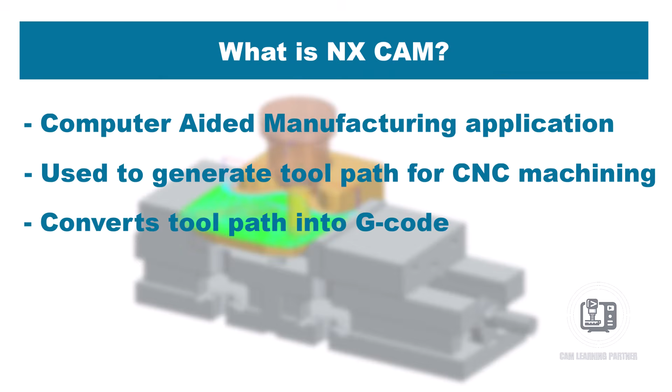In this first video, we are going to take a simple example, but we are going to touch upon all the elements, starting from importing a geometry to setting up your coordinate system, defining the workpiece, setting up vice, tools, creating toolpath, and post-processing. All of this will help you to get started with NX CAM and to create your first toolpath.

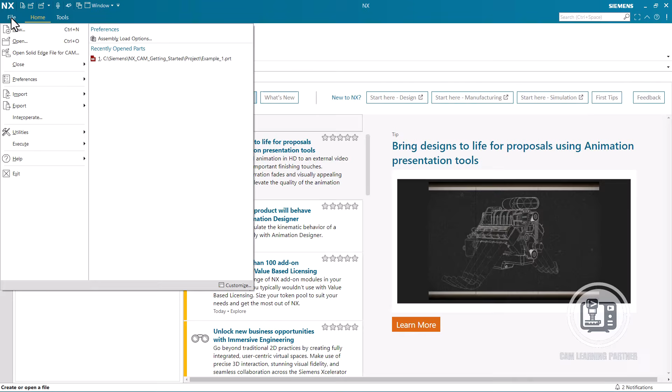So let's start. I have the NX CAM application open right now. Inside the application window, you will see some ribbons which will be quite common across various environments, for example in manufacturing. First you have a file menu where you can create a new file, open an existing file, open even Solid Edge files, and access preferences and much more. We will go through all of these options later in more detail.

Then you have Home tab and Tools tab. These tabs hold various functions on their own, and these functionalities may vary depending on the environment you are in. Right now we are in the gateway, which is the main entry point of NX. Here you will see new, open, similar functionalities that we saw in the file menu and many others. We will cover functionalities like assemble, load options, customer defaults, etc. as we move forward in future videos.

Then on the left hand side, you will see a settings button that will allow you to control the behavior of your resource bar on the left hand side. And then you have other options such as notification center, browser, history or recent files, roles, which is very important, and we will come to that in a few minutes.

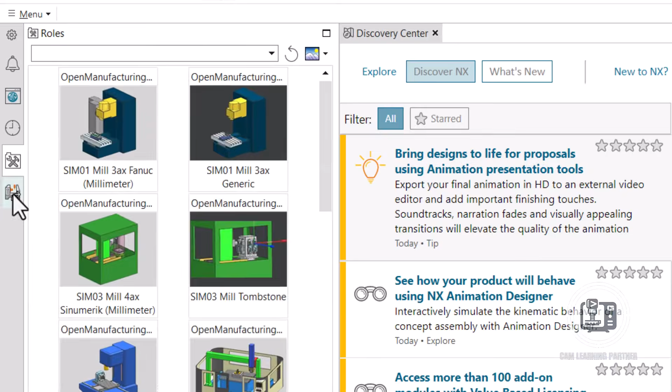And then you have manufacturing samples, which are related to the CAM environment. Here you can open any existing manufacturing sample that is supplied inside NX CAM by default out of the box. You can open these samples and observe how they are set up. But today we are not going to go through these samples; we are going to create our own project.

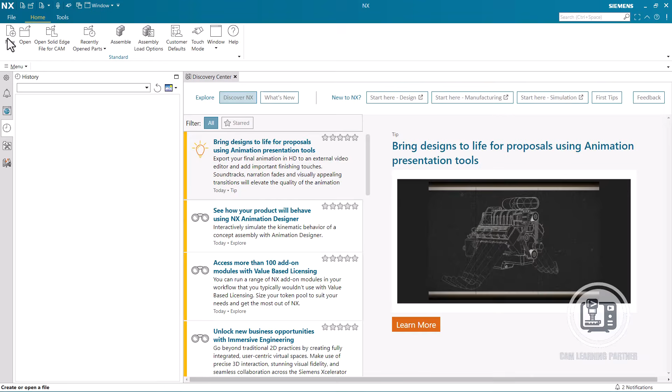So let's start by creating a new file inside NX. Once we select the new button, NX presents us with a new dialog where we can choose the type of file that we are trying to create. Here we can choose to do a new model, a drawing, an additive manufacturing model, or anything else. Currently we are interested in a manufacturing file. So we will choose manufacturing, and then inside templates we will choose blank.

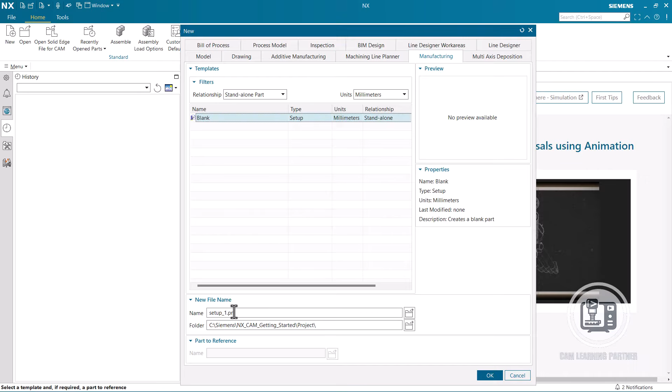We can also refer to an existing file in case we already have a 3D model and we want to create a new project based on an existing model. We can also change the units if we want, but right now I will go with the default, which is millimeters. Then we can define the file name and the place where this file is going to get saved. This is fine for now, so we will click OK, and then we will jump into the manufacturing environment.

Once we click OK, NX presents us with the manufacturing environment, and this is where all of the programming will happen. Don't get overwhelmed by all of these buttons and options that you see right now. We are going to go through many of them in this video, and by the end you will be familiar with a lot of them, you will feel at home, and it will be the best place you will want to be inside your system.

We see this little dialog first of all, because currently all the buttons are grayed out. So we have to get rid of this dialog. So what does it say? It basically asks us for the session configuration and the setup that we want to create.

So it's not like we need to specify anything right now. We just keep it to default, which is CAM General and Mill Planar. We can configure everything at a later point once we start building our setup. And we want to be flexible, so we will go with the defaults.

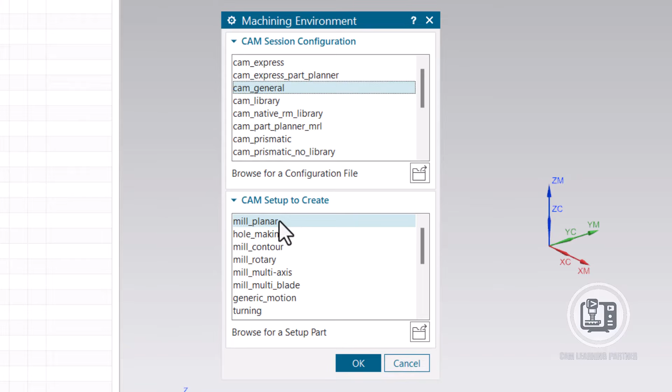But if you want to choose any specific setup, for example, turning, or you want to build on a session that has some configuration on library, on prismatic part, etc., then you can choose your configuration or your setup accordingly. Let's click OK for now. And now we are in the manufacturing environment.

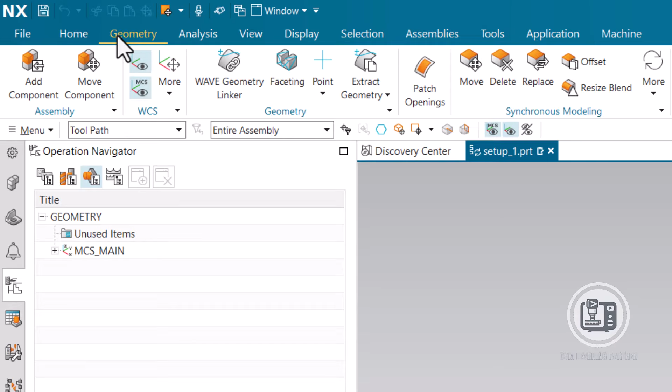So inside the manufacturing environment, notice that you have a lot of other ribbons, such as besides Home, you have Geometry for functionalities on everything geometry related. Then you have the Analysis tab for analyzing your model, View tab to control everything around view, creating sections, planes, etc.

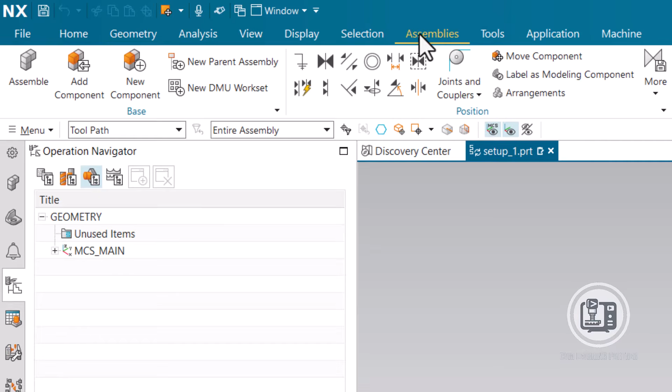Display tab to control the model display, Selection tab to handle how the selection happens inside NX, Assemblies to import new models, define relationships, moving the components, etc. Tools tab to help you with any miscellaneous functions such as moving objects, assigning materials, expressions, recording, etc.

And then the Application ribbon that holds all the rest of the environments, and from this ribbon you can access any other environment such as modeling, drafting, and many more. And then we have Machine. Again, you can choose to have various other tabs also.

You can customize this basically by clicking the right mouse button and enabling or disabling any other environment or ribbon. But right now, let's go back to the default, which is the Home tab, which holds all of the important functionalities. So inside Home, we have many important buttons that are going to help us to create our toolpath and to do everything else.

So it's like a workflow. If you start from the left, you first want to create your tools. Then you have to set up your geometry, and finally you create your operation. Then you have options to choose any strategy that NX tells you would be the best fit. So it predicts your behavior inside NX CAM, how you use the application, and it tells you what would be the most probable strategy that you may want to use.

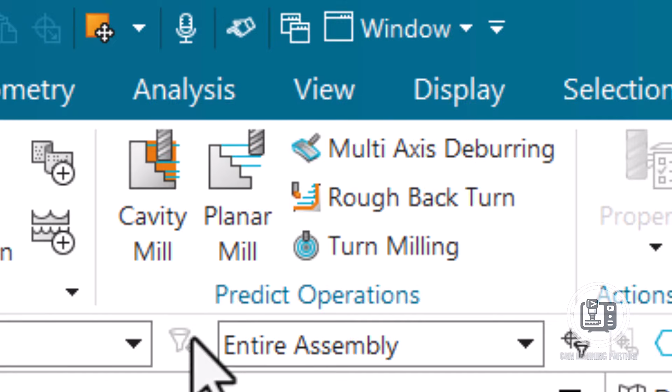And then you have additional actions such as generating your toolpath, checking your toolpath for any collisions or gouges, validity report, verification of the toolpath, simulation, post-processing, and many other functions that we will take a look at in the later part of the videos.

On the left hand side, you have the Assembly Navigator, where if you have an assembly, you will see the whole structure. Then you have the Part Navigator, where you will see everything related to your part, such as the model tree, your planes, sketches, features, etc. And then the most important thing is the Operation Navigator, where we will be spending most of our time inside NX CAM.

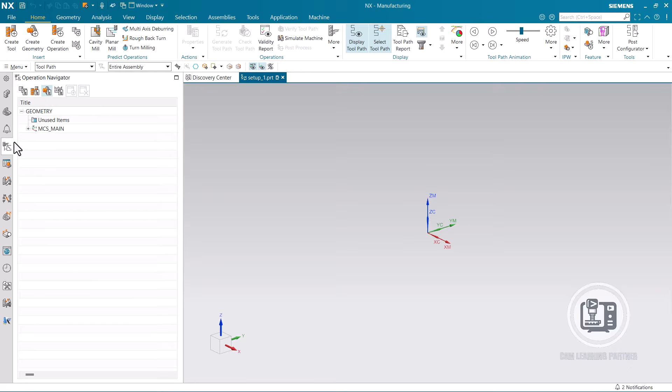So these two things are most important. First is the Home tab and second is the Operation Navigator. This is where we have to be in case we are working in the CAM environment. Now remember, in the beginning I told you that roles are very important. You have to go to Roles, choose Industry Specific and set it to CAM Advanced.

So you can double click on it and choose OK, and it will set your CAM environment to a more advanced user interface or layout, where you will have most of the common functionalities available. You can still configure the roles depending on your preference and how you use NX CAM day in and day out. But let's go with the default role. Now we are back to the Operation Navigator and the Home tab.

So we have to start with the model now, because we need something to generate our toolpath on. Currently it's empty. So let us import an example part file that I have available with me. So I will go to File, Import, and then I will choose STEP file. So STEP 214, I will browse to the file in the Explorer. So now my 3D model is finally imported from the STEP file.

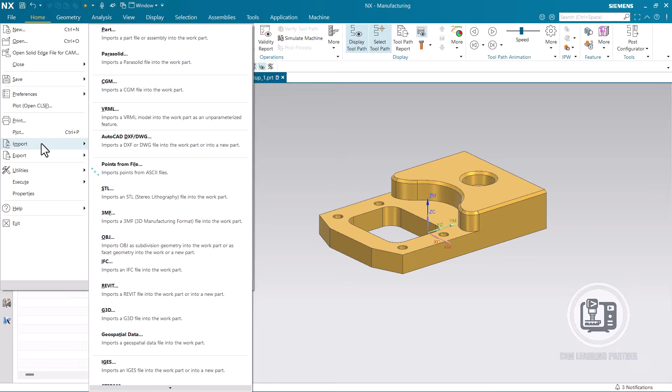Similarly, I would want to import a vise. Obviously, this part will not be machined on its own. There will be some work holding device that will be clamping this part on the machine. So we will be using a vise right now. I have this vise already available. So I will import this vise as well.

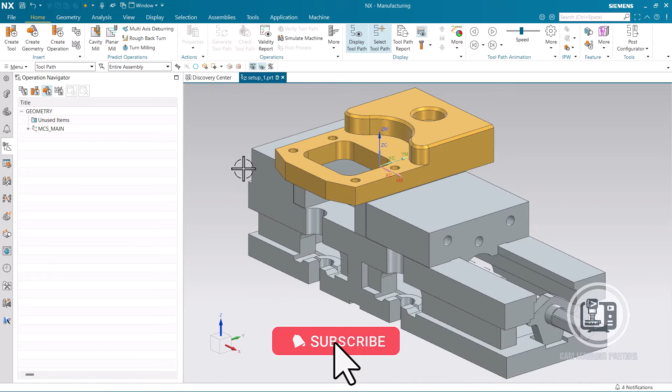So finally, the vise is also imported. Let's double click in the empty space to fit everything on the screen. Now notice that the part is out of the vise actually. It's not completely fitting the vise.

This will be the case most of the time when you import multiple objects in NX CAM, because obviously all of these parts will not be fitting well with each other immediately the first minute you import them. So you have to align them properly so that they are located in the right place. So how do we do that?

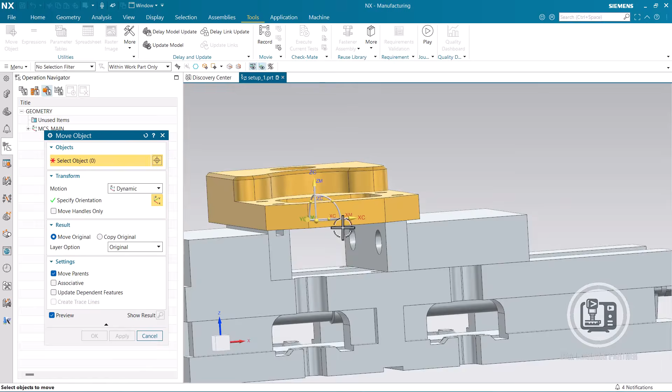We can either move the vise or the part. In this case, I think moving the part will be an easier choice. So let's do that. I'll go to the Tools tab and choose Move Object command. The Move Object command helps us to move the part file or any other geometry inside the CAM environment specifically in this case.

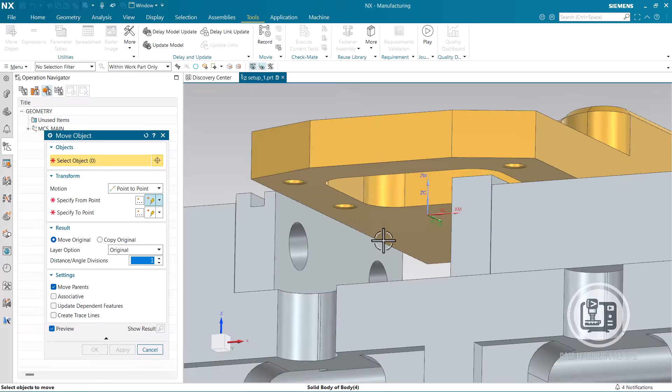So I will choose the part and then I will choose the method by which I want to move this model. I will choose point to point method. I will choose the midpoint here on my workpiece, and then I will choose the midpoint on the fixed jaw. Once I do that, I will hit apply. By clicking on the apply button, the dialog box stays open and my function executes. So in this case, the part is now moved to that midpoint.

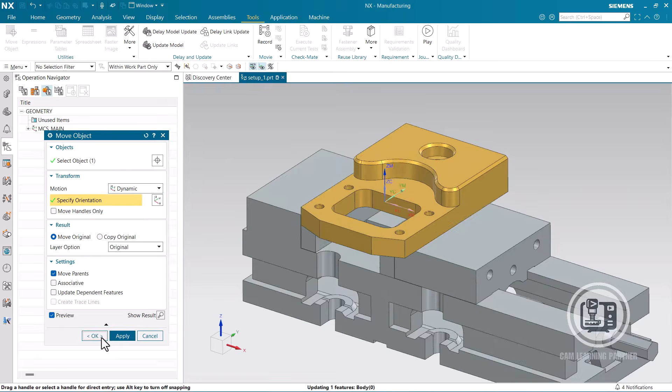Secondly, I want to move this part slightly on the inside of these two jaws. So I will again select this object, but this time I will do a dynamic move. I'll choose the Z axis and move this part, let's say -8 millimeters, so that it goes on the inside. I'll click OK. And now you can see that the part is on the inside of the fixed jaw.

But on the other hand, we have some problem here. The part is actually inside the jaw. We don't want this. So we have to move this jaw also. So how do we move this jaw? First, we have to know what is going to be the exact distance. So either we can use the same method, that is moving this point to the midpoint of the part, or rather we can analyze the dimensions of the part, which is going to be a very handy function for you whenever you are working on any part.

So if you are working on a 3D geometry and you are going to machine that part, you have to know the dimensions or the size. So you can use this measure command to measure the dimensions such as height, length, width, angles, distances, all sorts of things. So I've chosen the object type measurement and I selected two faces on the model. Notice how NX automatically presents the distance, which is the minimum distance right now based on my selection.

I can also choose points or bodies in case I want body or point type measurement. I can also have point selection, vector selection, and much more.

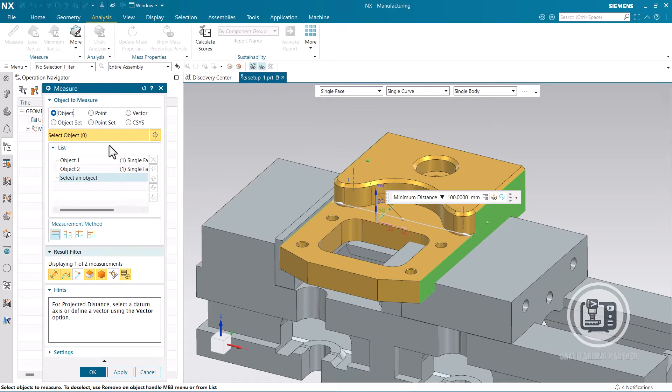So now I know that the distance is 100 mm. I'll click OK. So now let's align the second jaw with this part. To align the second jaw, we will use the same command, but we will use a shortcut key now, that is Ctrl+T. Then I will choose the object, and now I will select distance between points method to define the distance between the jaws. So I'll select the origin point and then the measurement point and the vector. I can choose these vector directions to define the direction along which the movement has to happen.

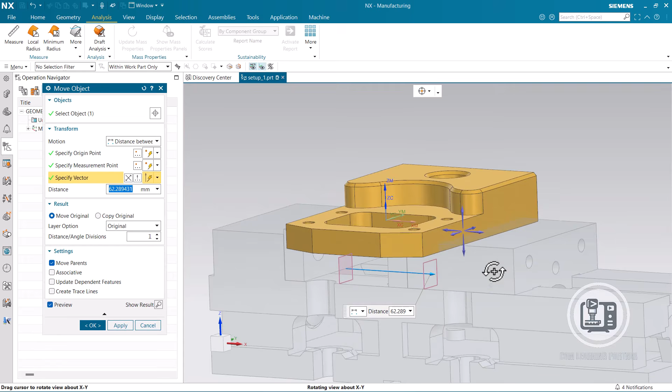Now once the direction is defined, I can define the distance, in this case 100 millimeters. So this will actually move the part. But notice that we were not interested in moving the part, so I will shift and click on the part to deselect it, and then instead select the second jaw. Notice how I went back to my selection and changed it by using the shift key. So you have to press and hold the shift key, and then if you make any selection, it will deselect that object.

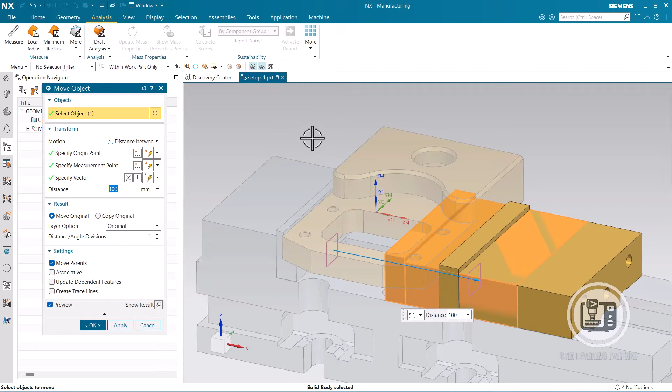Then I will click on the OK button, and my second jaw is also moved. And there we have it. Our setup is almost ready. So the next thing that we need in our setup is the blank geometry or the stock. The stock is required to define the initial material. Obviously when we are going to manufacture this part, there will be a raw material. So we are now going to define the raw material for producing this part. We can go to the geometry tab, and then inside the point drop down, you will see the bounding body command.

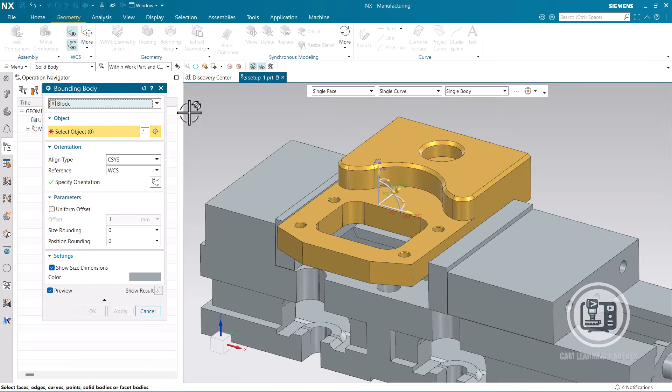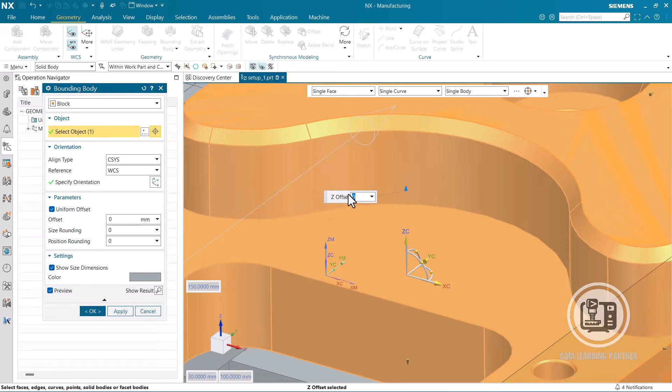So this is very useful, and it can allow you to define a block, for example, or a cylinder. So I can choose the object, and NX will automatically generate a bounding body, in this case a bounding block. I will define a 0 mm offset because I don't want any additional offset, but rather I'll just add 1 or 2 millimeters of distance here. So basically a top offset, because I want to do a face milling as well. I'll explain what that is in a few minutes. I'll click OK. And now our stock model is also defined.

Now with everything defined for our setup, we just need to get rid of these coordinate systems, or at least do something about them. You can see these coordinate systems XM, YM, ZM and XC, YC, ZC. And then you also see this coordinate system in the bottom left corner of the graphics area. This is the universal or absolute coordinate system. It basically indicates the directions of your main coordinate system. It is not the place where your main coordinate system is located because it is static and remains fixed on the screen.

The second thing is your work coordinate system. If you press W, your work coordinate system will get hidden. If you press W again, it will be shown again. So depending on the use case, you can enable this, but right now we can simply hide the work coordinate system because we don't need it right now.

The last thing, but the most important one for CAM programming in NX CAM, is the machine coordinate system. It can be defined by going to your operation navigator, which has 4 views: program order view, machine tool view, geometry view and machining method view. The machine coordinate system is defined in the geometry view. We are already in the geometry view, and choosing the MCS. If we expand the MCS, you will see workpiece and another MCS. These objects come by default when we started the manufacturing environment.

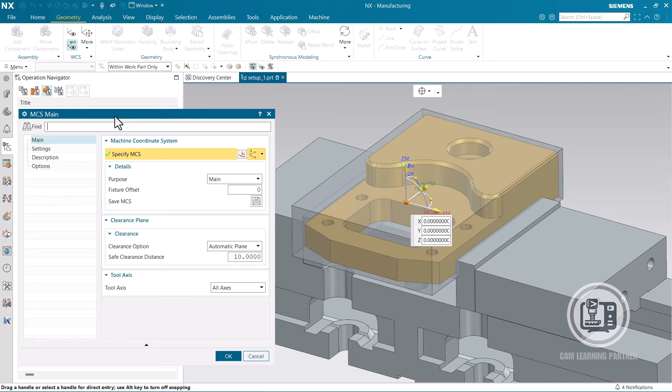MCS gives a reference for your toolpath, and whenever you post-process your toolpath, it will generate the output coordinates, XYZ values in case of 3 axis, with respect to this machine coordinate system. So your machine will also have to be set up accordingly, and that is how your machine will know where it has to go. For each point there will be an X, Y and Z value defined with respect to a certain point, and that is what this MCS is all about.

For us, I want to simply keep it on top of the blank or the stock. So I will choose the top face, and I have chosen CSYS of object, that is coordinate system of object. Automatically this coordinate system is now aligned with the center. I will also link the reference coordinate system with my main coordinate system. It is not of much use in the beginning, so we can just set it with respect to MCS right now. I'll cover the reference coordinate system and its use cases in later videos.

Next is the purpose of this main MCS. We will change the purpose of this MCS to local, set it to fixture offset and give the fixture offset value as 1. The value of 1 means that the fixture offset will be output as G54. G54 is important because on the machine we will be setting this offset value, and the machine has to know which offset to use. We have to choose local because we are using a local coordinate system, not a main machine coordinate system as such.

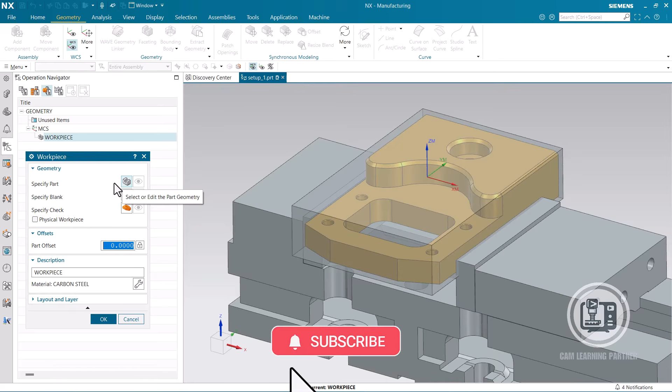Let's define the workpiece now. So we are getting close there to our toolpath. We need to set up the workpiece though. So for workpiece, we need to set up 3 main objects primarily. The third one can be optional depending on whether you have it available or not. But the first 2 are mandatory for most of the toolpaths.

So first one is the part. Obviously, you need to define the finish part. So I can keep my cursor on the object, on the workpiece or blank, and then it will give me choices. I will choose the final part, which is my workpiece, and then I will choose blank. So for blank, I will define the blank geometry that we created earlier, and I'll click OK.

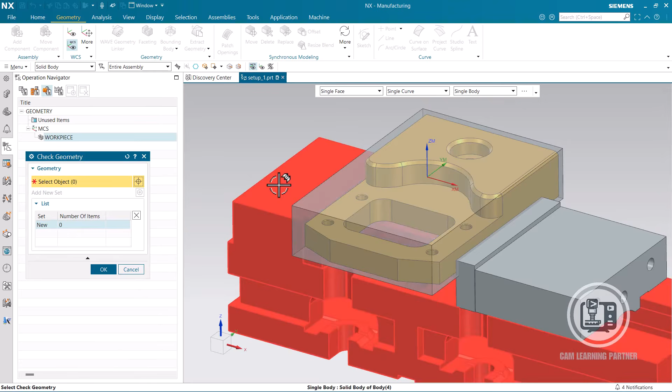And last is check. Because we already have the fixture defined, we will define this as our check geometry. So this check will be used to avoid completely when generating a toolpath. So if we have this kind of setup, NX CAM will try to avoid the jaws and ultimately prevent any kind of collisions that may happen when you actually run this toolpath on your machine.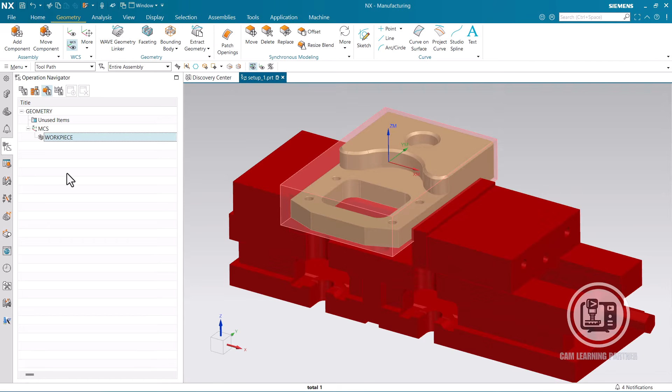You can define additional offsets right now, but we don't need to in this case. So we'll click OK. And then if you select workpiece, you will notice that everything is completely defined. These colors indicate that something is defined as check, something is defined as blank, and your workpiece.

Now with this setup, let's go ahead and define our tools, because remember we started with the process. We had to define our tool, the geometry, and the operation. We defined geometry already because it was the first thing that was coming on our operation navigator. Obviously there is no specific order as such. You can start with geometry, then define tools, or even you can create operation and then inside your operation define geometry and tools. So it's up to your preference, but it is also recommended that you start from the left. Now let's go ahead with the tools.

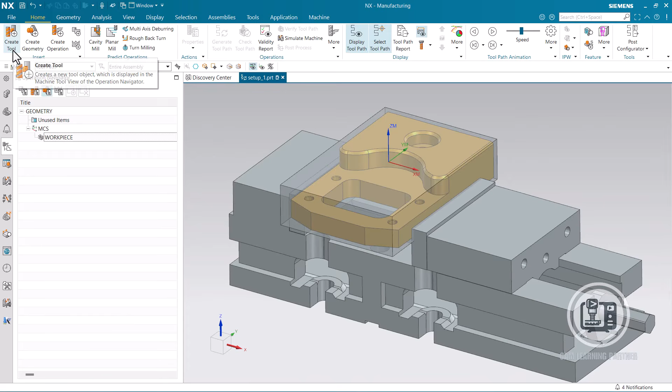So to create tool, you can select the create tool button. Now you have a lot of options. You can choose which type of tool you want to create, whether it is a flat end mill, chamfer mill, ball mill, spherical mill, etc. I can also retrieve tools from the library. So if I choose retrieve tool from library and I choose a milling tool, then I can give, for example, diameter of 20, and I can call a 20 millimeter tool. I'll click OK.

I'll call another tool, this time let's say a 50 millimeter for facing. And we can see the preview of these tools also if you want. So we can see the preview as well. I'm happy with this tool. I'll click OK. In case I want to create any other tool, I can select the tool type, click OK.

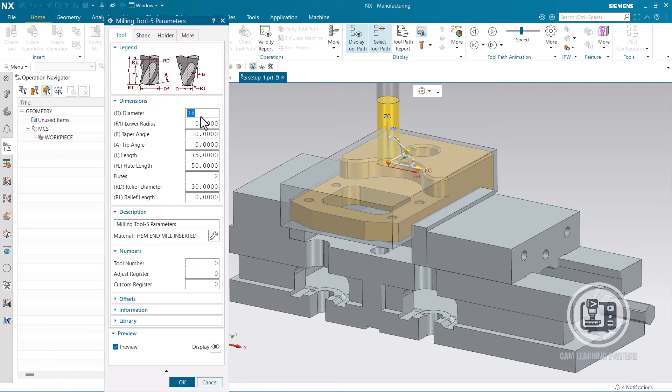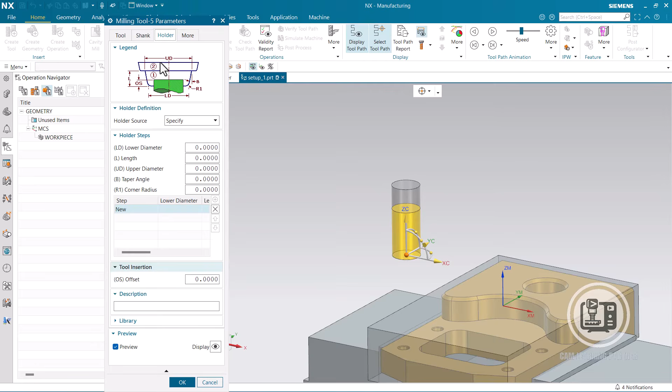And then I can define the diameter and various other parameters that you see on the screen. So depending on these parameters, the visual will also update. You can see the tool getting updated, and then you can also define various other parameters. For example, I'll define the flute length, total length, even define the holder. For example, I can go to the holder library, retrieve a new holder, or even I can choose to create a holder on my own. But right now I'm happy with the predefined holder from the library.

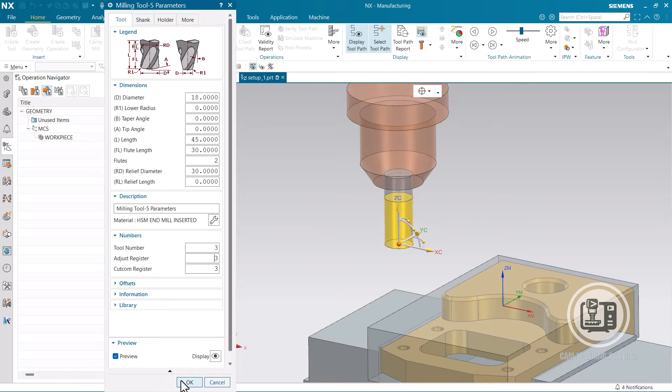I can define the insertion offset also if I want to. I can define it as 5 mm, let's say, and I can give the tool number also. So I already created 2 tools, so I will give this tool number 3, and I will also give adjust register and cut comp register. These are basically length adjust offsets and cutter compensation offsets. More on these in the later videos. Let's click OK, and my tool is set up.

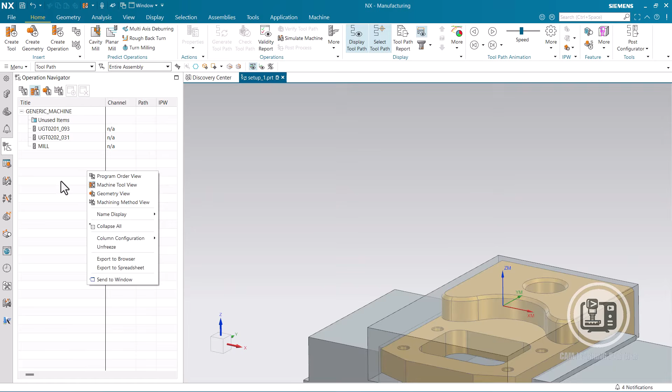So if I go to the second view, which is machine tool view, you will see all these tools defined over here. I can also configure these columns so that I see the relevant information immediately. You can go to column configuration and then configure your columns. We'll cover this later, but it is possible. Let's check if these tools have the right tool numbers. They don't, so I will define the tool numbers. Now all the tools are defined with the tool numbers. So now we are good to go to create our first toolpath.

Now let's hide the blank for simplicity purpose. So we will go to the part navigator and hide the bounding body. Notice that the other bodies are imported. These are coming from our step file, so we can ignore them.

In case we want to make any changes, we can do that by going to the geometry tab and using the synchronous modeling functions to alter or change any type of geometry. But let's start with the toolpath. So I'll go back to geometry view and go to the workpiece and then right click and go to insert operation. Alternatively, I can select this object and click on create operation.

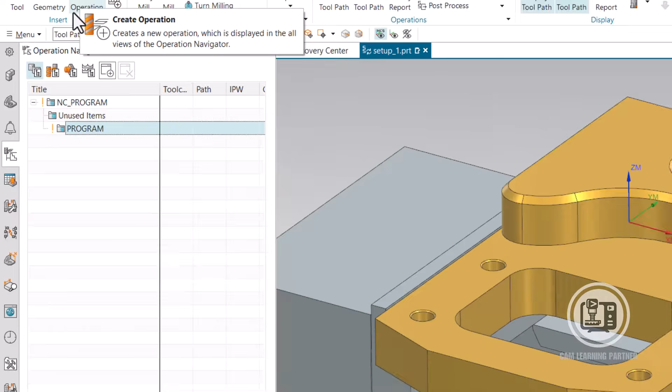You can also go to program order view, for example, and choose the exact location where you want to have your operation. This view, program order view, helps you to organize your programs and the sequence of those programs. So it is also very useful in case you have, let's say, multi-channel machines and you have a group of milling toolpaths and turning toolpaths. You want to organize them logically and in a sequential manner.

And there is a last tab which we did not talk about so far, that is machining method view. So the machining method view will help you set up some predefined settings, such as if I go to mill rough, you can see the stock or intol, outtol. So you can define an existing value that will be applicable for all the operations sitting inside this group. So if you set a stock of 0.5 mm, all the operations under mill rough will be using this 0.5 part stock value. And similarly, you can choose the intol and outtol.

These are basically tolerances. These allow your toolpath points to go inside the part or outside the part. So if it is balanced, then it mostly means that each toolpath point will basically vary between a certain tolerance range. So obviously the toolpaths are calculated on mesh in many cases, and there is a tolerance that comes into play. So this tolerance helps you to control to a larger extent the accuracy of your toolpath. Obviously you would not want to make it 1 micron, otherwise your toolpath will take so much time to generate.

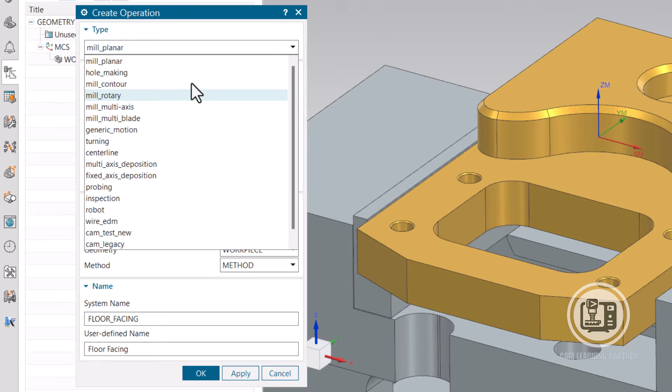And one important thing, it's not just these strategies. By the way, you have mill contour, mill rotary, so many other things. So if I go to mill contour, which is basically for 3-axis machining, you have various things like cavity milling, adaptive roughing, etc. Let's stick to the basics right now. We'll go to Mill Planar, and we were trying to create floor facing without wall because I want to do facing on top of this part and I do not have any walls right now. So I'll click OK.

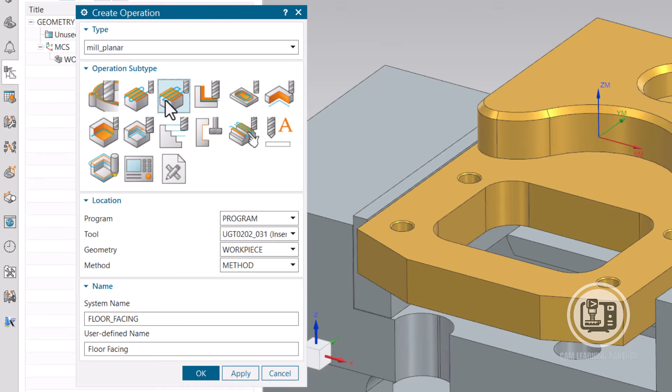Now for this operation, there are certain minimum inputs that are required, which is the floor or the cutting area. So I will choose this floor, but don't worry, because my toolpath is not going to be restricted to this floor. I have various options to control the extents of my toolpath. But let's go through some of the options, actually not all, because there are too many. And as I've been saying, due to limited time in this video, we will not be able to go through all these options, but in future, we will eventually cover all of these options in more detail.

So for now, because our toolpath needs some very essential settings to successfully create a good toolpath, I will choose zigzag. Maybe I will choose a step over value of 70, which is fine. And my tool is defined, so it's all good. If I go to feeds and speeds, I can set a speed, surface speed, feed per tooth, spindle speed, for example.

Let's keep some arbitrary values, and we can calculate the surface speed and feed per tooth accordingly. We can also control the rapid modes and then additional feeds such as approach feed, engage feed, etc. Let's go to cut region, which is also where our overhang value is defined. So I'll set it to 10%, for example.

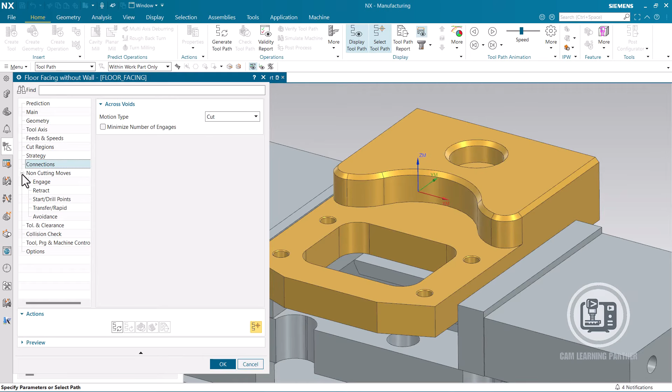Let's go to non-cutting moves, which is basically everything else besides cutting. We'll go to engage. Maybe we will choose a linear type engage and maybe relative to cut. So in whichever direction the tool enters, my entry will also be relative to that direction. And for the length of my engage move, I will choose a safe distance, let's say 70%, to give sufficient clearance to my tool.

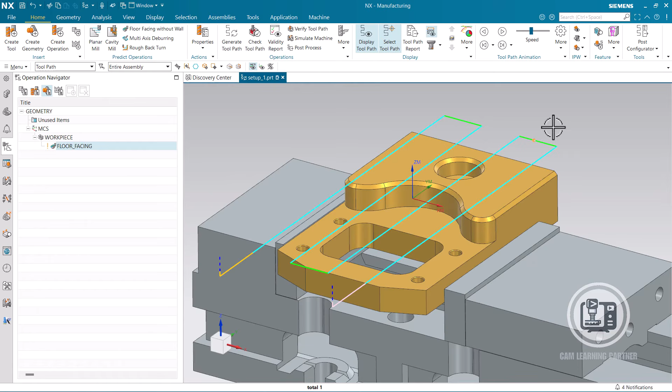So with that done, let's see how our toolpath looks. I would always recommend you to click OK and then generate your toolpath. So all of your settings for the operation would get saved, and then your toolpath would get generated. Notice that our first toolpath is ready, and we can already see this in the graphics area. So it looks beautiful, right? It's not just sitting there idle. We can do so many things from this toolpath.

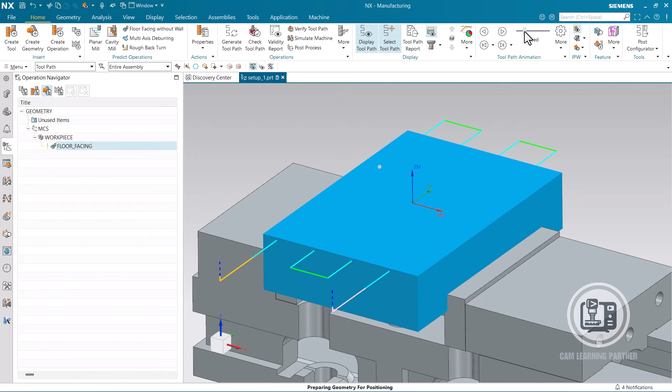For example, you want to see how the material is going to get removed, right? So we can show the IPW, which is in process workpiece. So our initial blank is now active. Let us slow down the simulation a little bit, and then I will play the animation. So the toolpath will now be simulated. Notice how the material gets removed. The tool is moving along the toolpath, and this is how the machining will also happen on the CNC machine. But now I think we are good with this toolpath. We don't need to make any more changes.

Let's go to the next step, which is machining this next step. So for this, I think an appropriate way would be adaptive roughing. So maybe I will go to mill contour. Although this is not a contour, I think the easiest way of generating an adaptive roughing toolpath on a stock model is using a 3D adaptive roughing. Let's choose a 20 dia end mill. It has some corner radius, so I think it will leave some material in the corner, but it should be fine for the example. Let's set the step over to 8% of the tool, which is good enough for us.

Cut levels are important now because we have multiple levels here. There's a top level, there's a mid level that we see here, then we have a bore or a counter bore, and then we have a bottom level as well. So I want to specify the top level and the bottom level to be this. I only want to machine this region and not anything else. I think this should be fine.

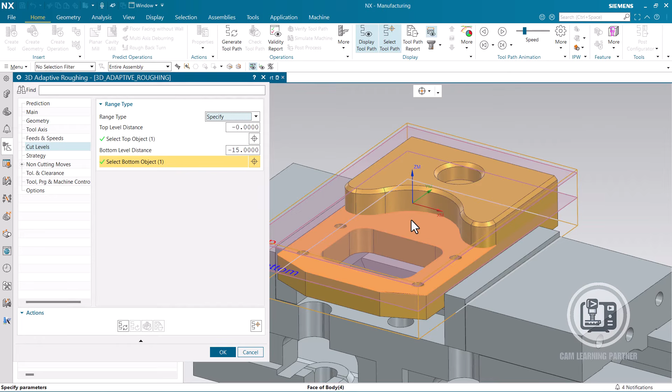And for the geometry, I want to consider the 3D IPW, which is basically the in-process workpiece. If I'm considering the 3D IPW, it will also take into account the stock with the previous operation. So remember the material that was removed after running the face mill operation. That is what will be considered for this 3D adaptive roughing now. So let's click OK and I will click on generate.

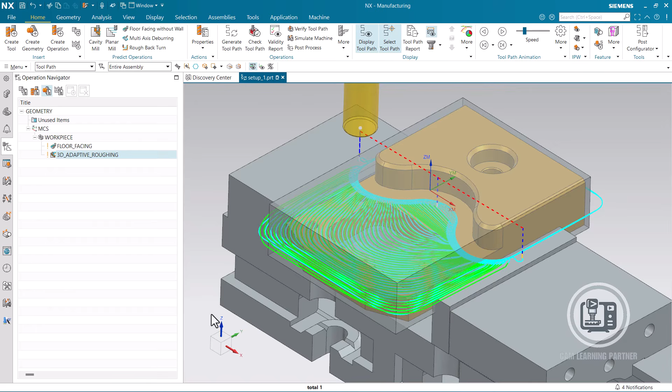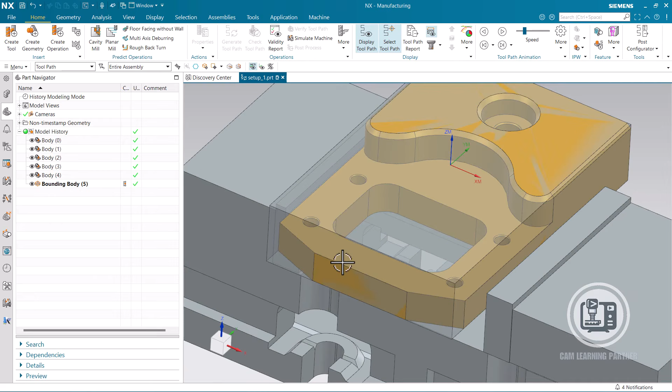So the toolpath already looks fantastic. It is going around the block. So now, let's see if we can avoid these moves. I can already see that there is some additional material here on the stock or the blank geometry. So we will go back to the bounding body, the initial step where we defined this body, and analyze if there is any offset. There's some offset. Let's make it 0 mm first. And then we will disable the uniform offset. Let's click OK, and the offset is gone.

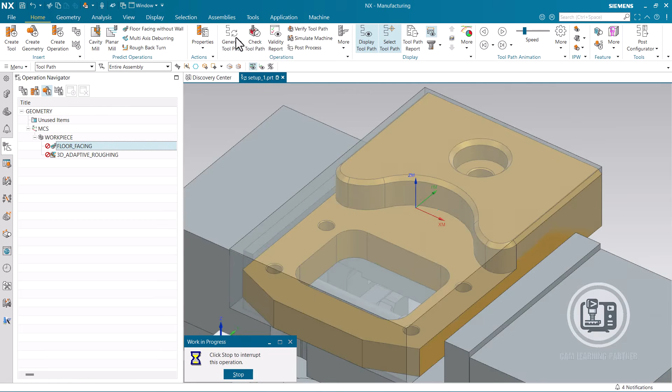I just wanted to add offset only on the top face, which is what I initially wanted, but the uniform offset option was on, due to which the offset got applied everywhere. So now all I need is to regenerate the toolpath. I don't think there will be too many changes on the first toolpath. It looks good already. Let's see the second toolpath now. Hopefully it doesn't go outside that region, and yes. Now we have a very nice toolpath. Let's hide the bounding body very quickly.

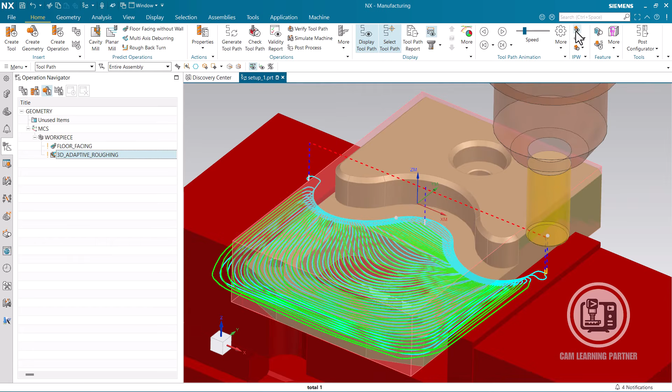So our toolpath is already looking good. Let's see how it works in action. So I will run the simulation now. Maybe I'll hide the toolpath and maybe make the simulation a bit faster.

So you can see with this adaptive roughing strategy, the tool gradually engages the material and the material removal rate always stays constant. So this greatly increases your tool life and also greatly reduces your machining time because you are fully utilizing your cutting edge of the tool and then removing the material at a much faster rate.

So our floor facing is done. You can notice that our toolpath looks good. Both of the toolpaths are looking really nice. So now let's machine this pocket with the planar milling strategy. Let's go with some strategy that allows me to define closed pocket with floors and walls. For example, in this case, I can choose this pocket milling strategy.

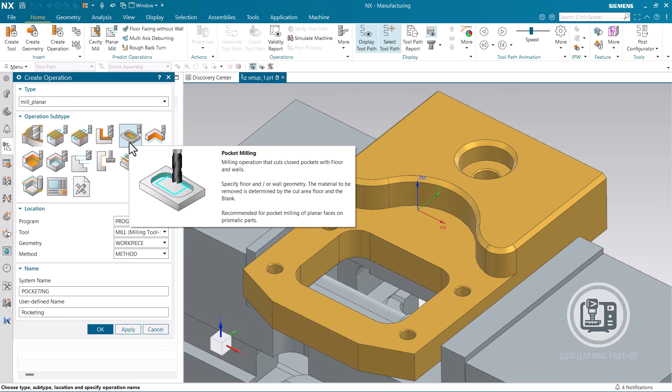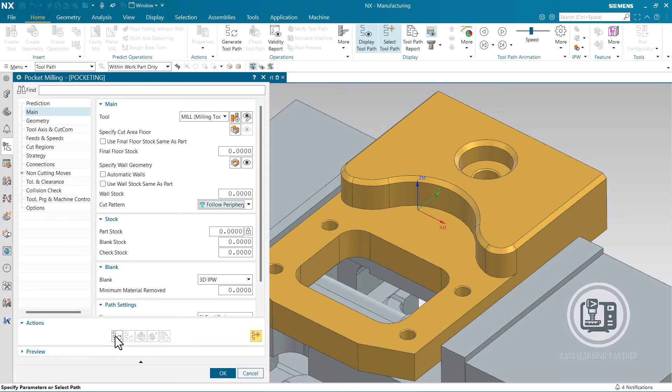I have defined the tool already. Let's select OK. Now I need to define the walls here. So these are my walls. So everything looks good. Let's see how the toolpath looks like. So the toolpath has generated, but the step over is quite big. Let's reduce the step over.

Okay. The toolpath looks fine right now, but the thing is it has taken a single cut, a helical entry, and then it is removing the material, which would practically be impossible. So what we need to define is the depths of cut here. So maybe we can apply a realistic depth of cut, but in this case, I'll just choose a depth of

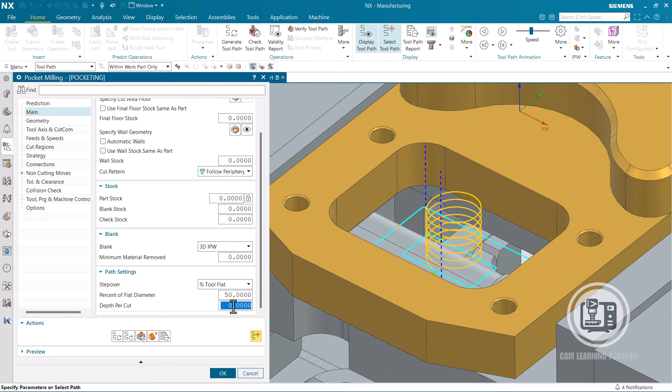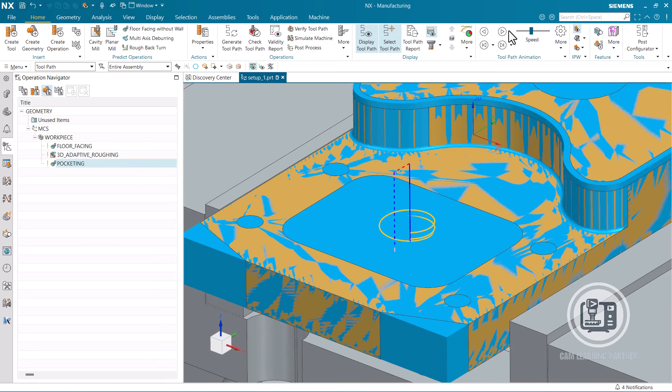cut of 2 mm. So notice how the tool is going to gradually enter the material with helical ramp, one pass at a time, and it is going to remove the material in this fashion. So if we see the simulation for this toolpath, notice how it removes the material one by one. Looks good, right? So everything is clear.

Quite a large amount of material from our part is already gone. There are only some regions left, but I think we can cover those later, such as these bits. You can still clear these portions using other strategies such as profile or any kind of 3D profile strategies. There are various ways of doing it.

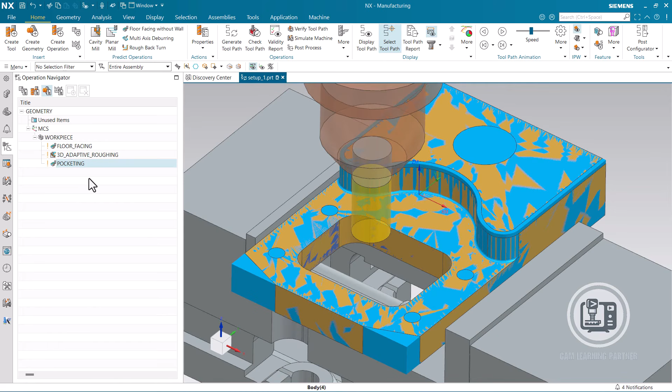So I'll go to analysis, measure, and within operation dialog, I'm doing the measurement. If I select this cylindrical face, I will see the pop-up, which is radius 3.5 millimeter or the diameter 7 millimeters. So I can directly create a tool with a diameter of 7 millimeter. So I will choose a standard drill. Let's keep it simple. I will give the diameter 7 millimeter. No need to define any holders for now. Let's give the tool number.

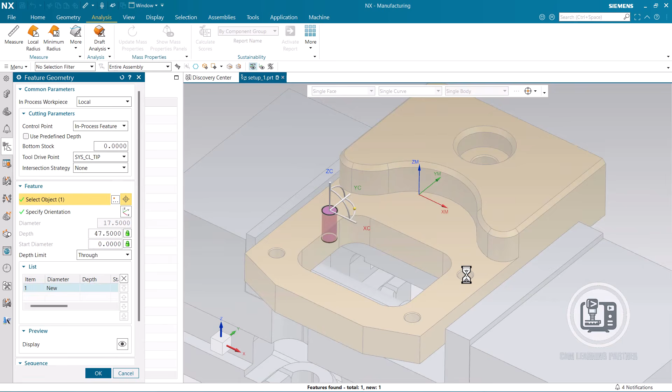And the last thing that we need to define is the feature geometry. So depending on the operation that I have chosen, the features will be recognized automatically along with their parameters. So I'm going to create through holes. So I'll click OK. I can define feeds and speed also and control various other settings, but let's look at them at a later point in time. I'll click on generate and this is my drilling operation.

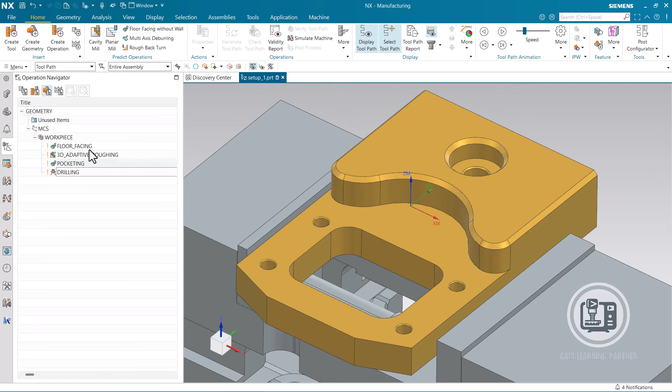We can also verify this, let's say with or without material removal. I'll just slow it down a little bit. Maybe it was too fast. This is how it looks like. Looks quite good now, and I think most of the toolpaths that we wanted to generate initially are good. So with this done, let us simulate one of these toolpaths on a machine. Sounds exciting, right? So let's do that.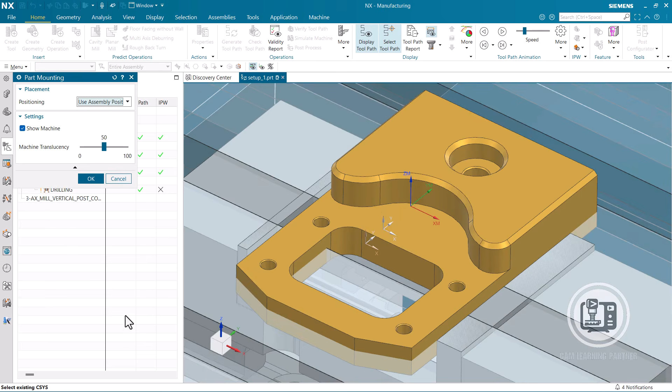So we'll go to machine tool view, double click on generic machine, retrieve a machine from the library, let's say a milling machine. I'll retrieve a 3-axis milling machine with Fanuc controller. I'll select OK. And then I want to position my machine with respect to my part. So I have to measure this height and accordingly move my part.

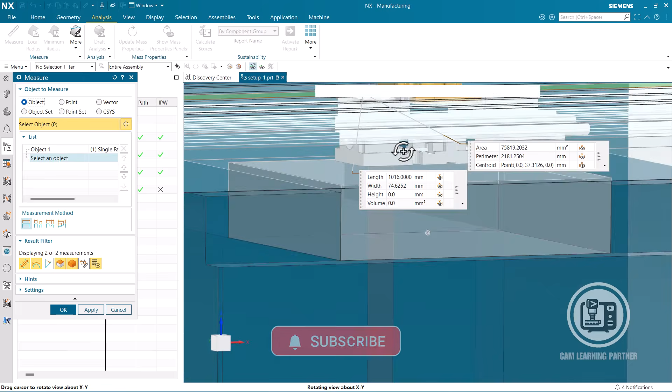So how do I do that? I can actually find the total distance from the top face all the way to the bottom of my vise. So my vise face is located somewhere over here. So in this case, this is my vise face.

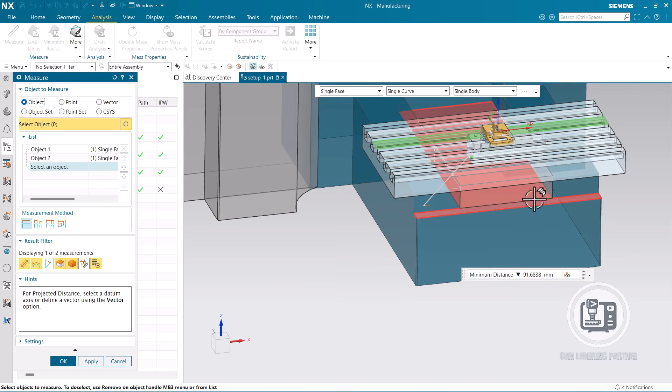So the distance approximately is 91.6838. I'll just copy this value. I'll go back and now I will simply choose the part mounting function, and then I can move the machine downwards. So I'll give this value, press enter, and there you go. My machine is perfectly located with respect to my setup. Alternatively, I can also adjust my setup as per the machine. Both the ways should be fine.

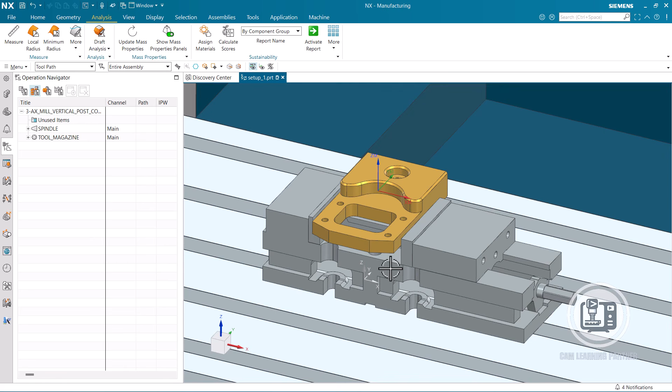And now with this machine in place, I have some coordinate system. So I can hide this coordinate system by using a show and hide command. I can press Ctrl plus W key to activate the show and hide command. And here I can hide all the datums. So my coordinate system is hidden now. And now let's go to the simulation tab.

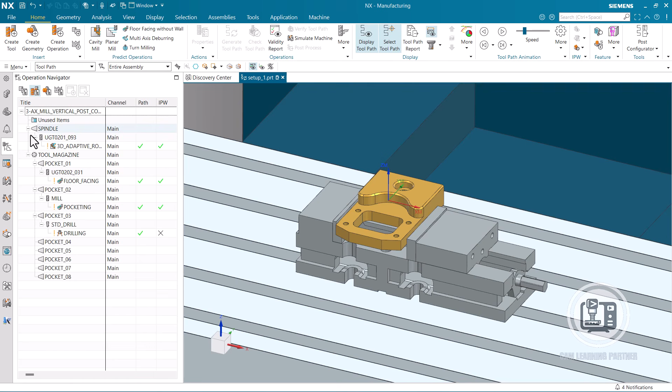So before I go to the simulation tab, I just want to make sure all of my tools are properly located. One of my tools seems to be outside the pocket, so I will move it inside the pocket. We have to make sure that each tool is located in a pocket and we only have one tool in one pocket. Obviously we cannot have multiple tools in a single pocket, and you can see these tools are located here in a nice place.

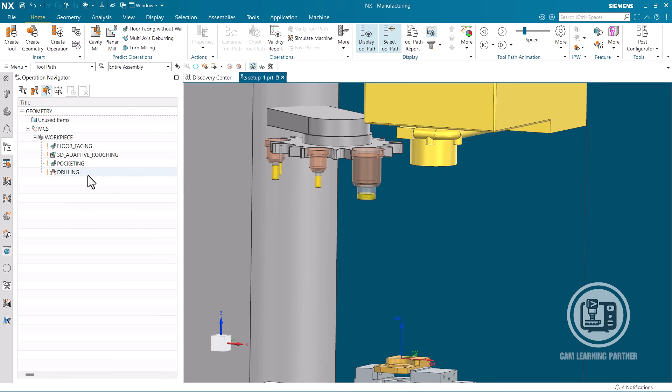And you can see also the tool without the holder, which we intentionally defined because I just wanted to show you how it actually looks like without the holder. You can have this kind of arrangement, but then it is not very realistic. In case you are not simulating with the machine, then you can safely ignore it. With simulation, it is not very good.

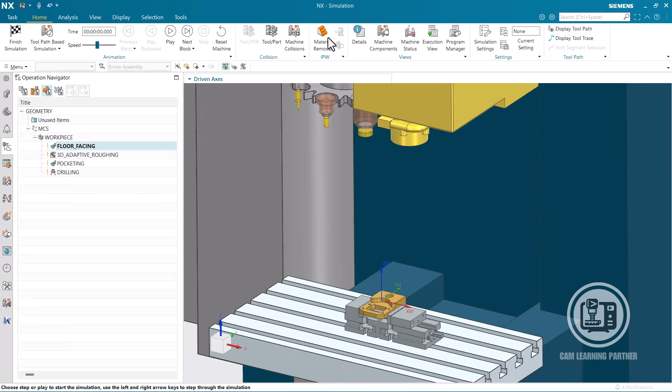So let's simulate our floor facing toolpath. I'll go to simulate machine. You have three ways of simulating your machine. Let's organize the views first. So I will move these windows. Looks good. I'll just give some space to the machine. And now we can simulate using different ways. We can use a toolpath based simulation, machine code based simulation, or external program simulation.

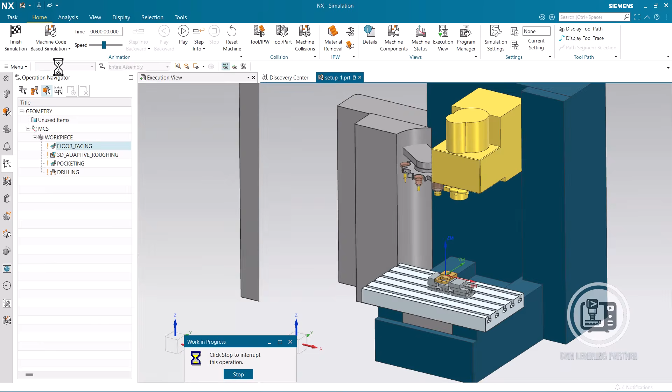In this case, let's say we will try machine code based simulation, and what NX CAM will do is use the post processor available with this machine to generate the G code, and then when we simulate, it will actually run this G code and move the machine accordingly. So I will also display the tool trace. I'll hit the play button, and with tool trace on, NX CAM should start simulating the toolpath.

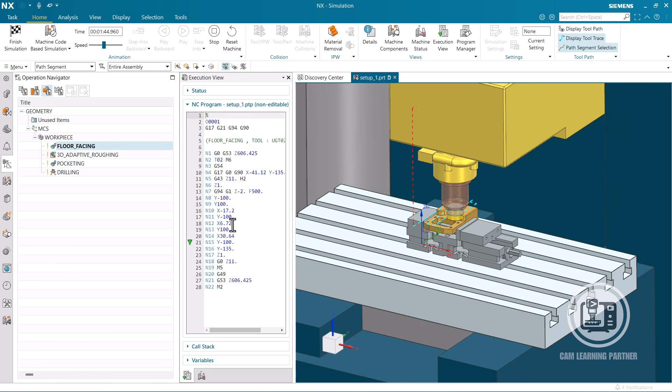Maybe I can speed it up a little bit. And if I zoom out slightly, notice how the slide moves, indicating the real behavior of the machine as per the coordinate systems that are currently generated. So our toolpath looks quite good. There is no collision as such. I'll click finish. And the last step in this case would be to post process.

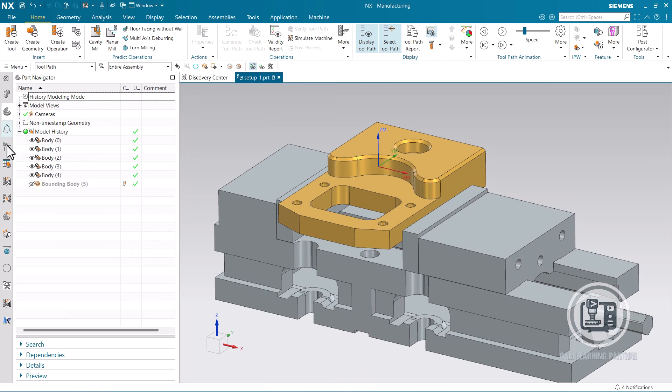And if you want to hide your machine, you can just go to assembly navigator and hide the machine. You can even hide the fixture objects this way if you want, but I think it should be fine with the fixture. So let's keep it on. Now let's go back to operation navigator and do the final step, which is post processing. Let's take the adaptive roughing toolpath, and we'll click on post process. I'll select 3-axis mill vertical. I'll click OK.

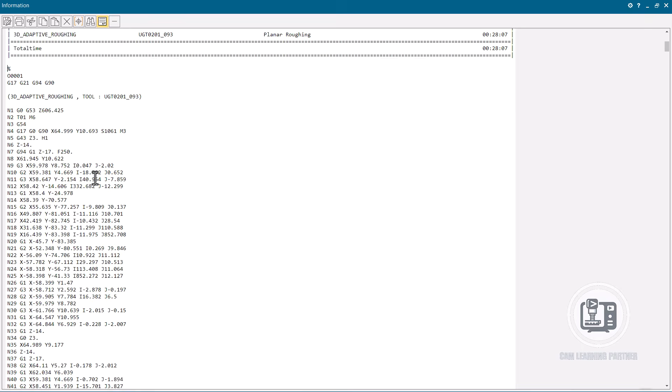With the default post processor, because it was a Fanuc controller, you will see this header and then all the supporting code, and then you have your coordinates. It's a long NC file, but this is how you finally get your NC code, and this file would also be saved in the specified directory which we chose at the time of post processing.

So with this done, I hope you found the video useful. I hope everything that we covered in today's video was helpful and you were able to understand the whole process in NX CAM, starting from importing your first part to post processing. And we created quite a lot of toolpaths such as facing, adaptive roughing, pocketing, and even drilling.